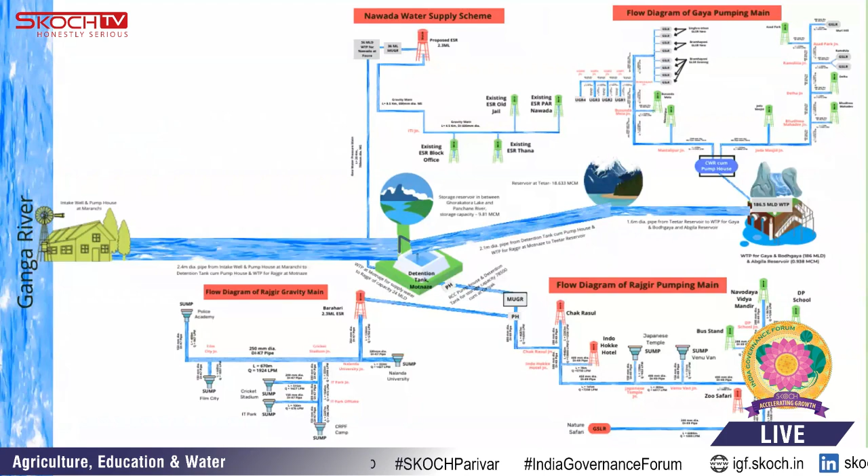This is a 151 kilometer project from Hathidah to Gaya town. In this project, we are feeding drinking water to 3 water-scarce towns of Bihar: Rajgir, Nawada and Gaya.

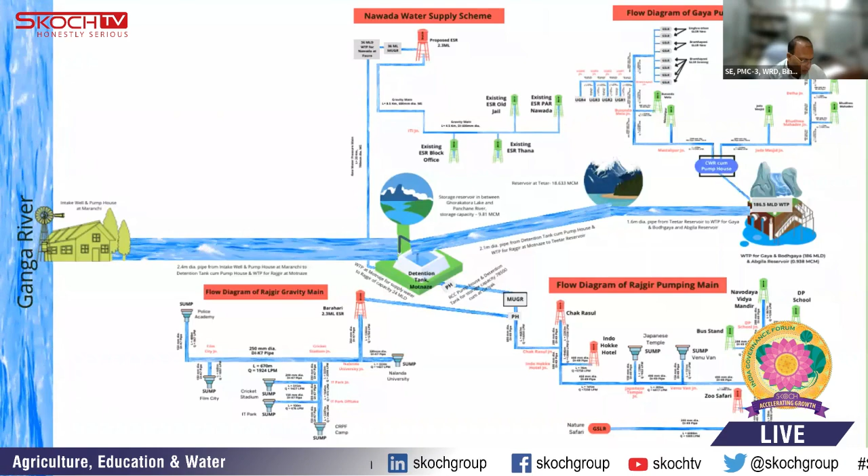In this project, we are lifting flood water in the monsoon season, for 4 months from July to October, lifting it around 80 meters from Ganga up to Gaya. We are creating 2 huge reservoirs, one at Gaya and another at Rajgir, where we store the raw water for the remaining 8 months.

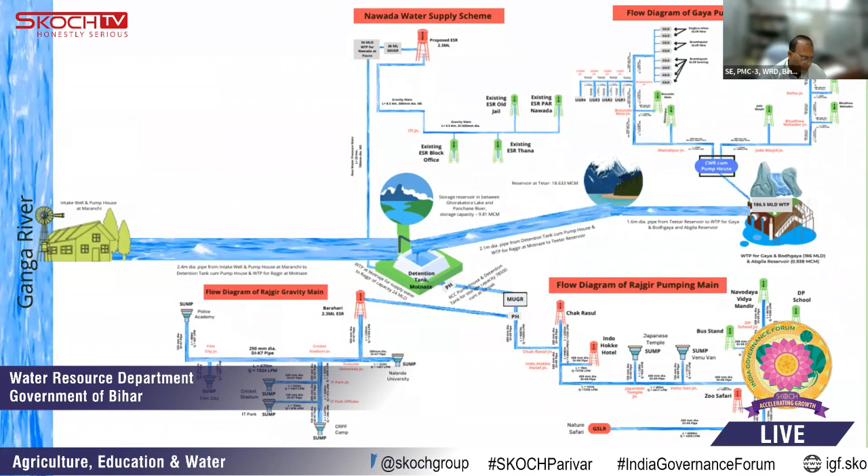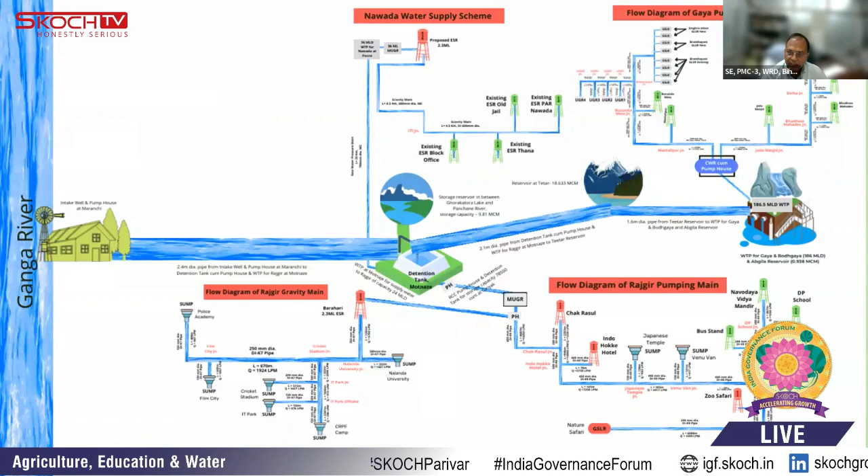We will supply drinking water throughout the whole year, after purification, to around 9 lakh people in Rajgir, Gaya and Nawada.

As I mentioned, this project has been formulated in light of our Chief Minister's flagship program, Jal Jeevan Hariyali Mission, due to the groundwater table lowering day by day in this area, and the resulting scarcity of drinking water.

In this project, we utilize flood water which was previously unutilized during monsoon and going waste into the Bay of Bengal. We extract this water during the monsoon period, store it in reservoirs for 8 months, and then supply it after purification.

In this project, water demand has been calculated up to 2051, and stage-wise we will increase our supply according to demand. Currently we are constructing this project for demand up to 2021, and gradually we will increase our capacity according to future demand.

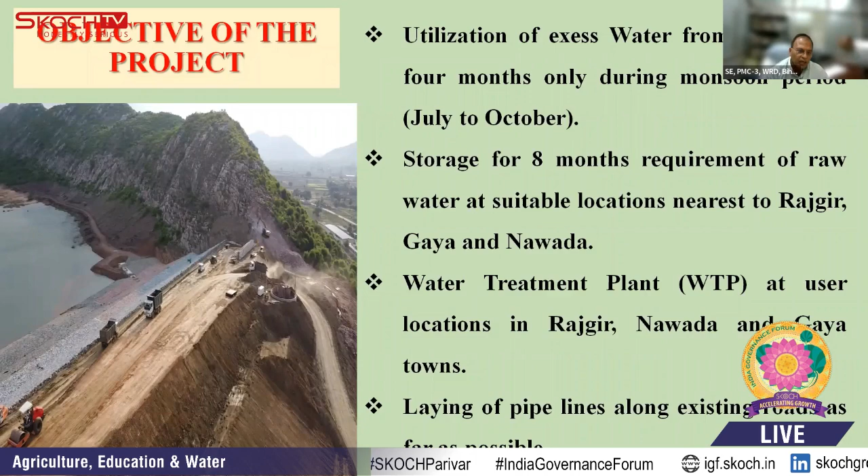Benefits of this project include employment creation for people in this area, socio-economic benefit with enormous convenience of drinking water to urban and rural people and animals, and groundwater recharge facilitated by storage of water in the forest region of Rajgir Reservoir in Nalanda and the reservoir in Gaya, ultimately benefiting flora and fauna, including the ecosystem.

As such, the project is techno-economically viable. Agriculture produce will increase due to improvement in groundwater level.

Also, the wildlife sanctuary at Rajgir will be provided water from the proposed reservoir for various animals in the area and also water bodies inside the sanctuary.

Religious places such as Brahmkund, Saptadhara, etc. in Rajgir, which are hot springs, have become devoid of water as a fallout of alarming groundwater depletion. Declining rainfall, inadequate recharge of groundwater, and overutilization due to increased population appear to be the main reasons for decline in discharge in the Rajgir hot spring.

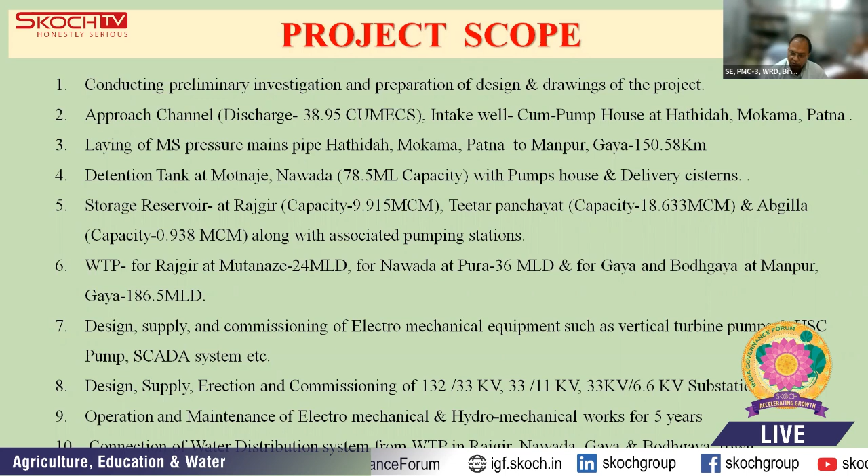These are a few pictures of the intake well at Hathidah Mokama, where we are extracting flood water from the Ganga.

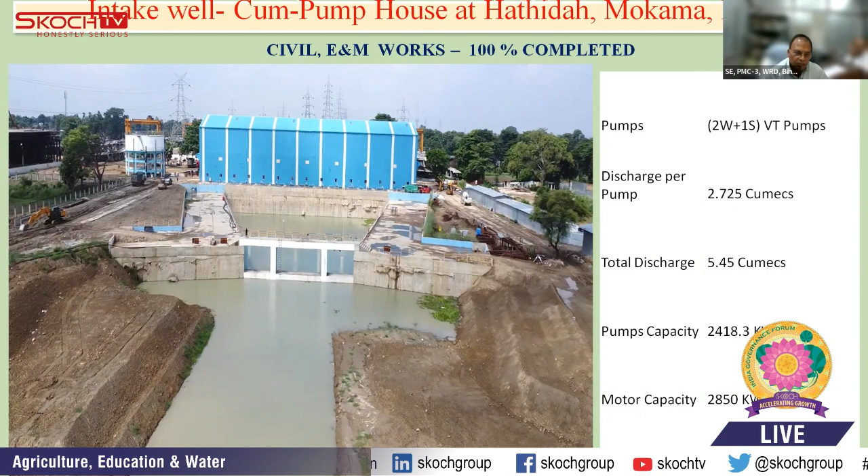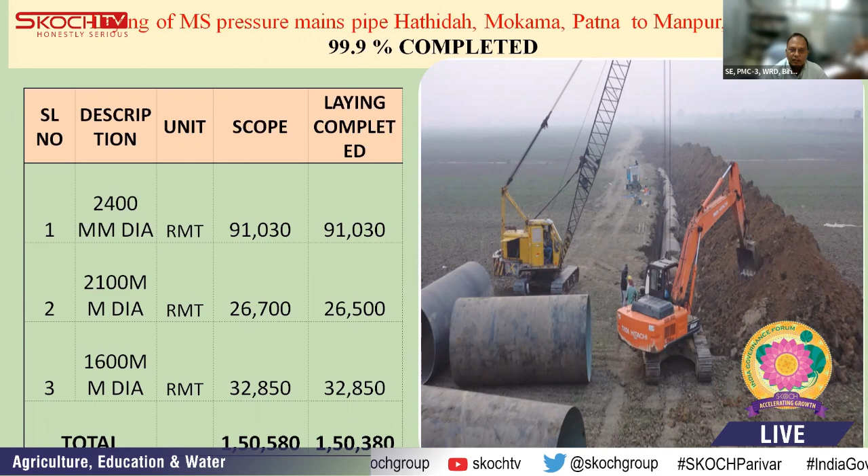These are pictures showing the laying of the MS pipe from Hathidah to Rajgir, and this is the detention tank at Motnaje, Nawada.

This schematic diagram shows the detention tank. We are taking water to the reservoir from here, and one pipeline is for Nawada town and another is for Rajgir.

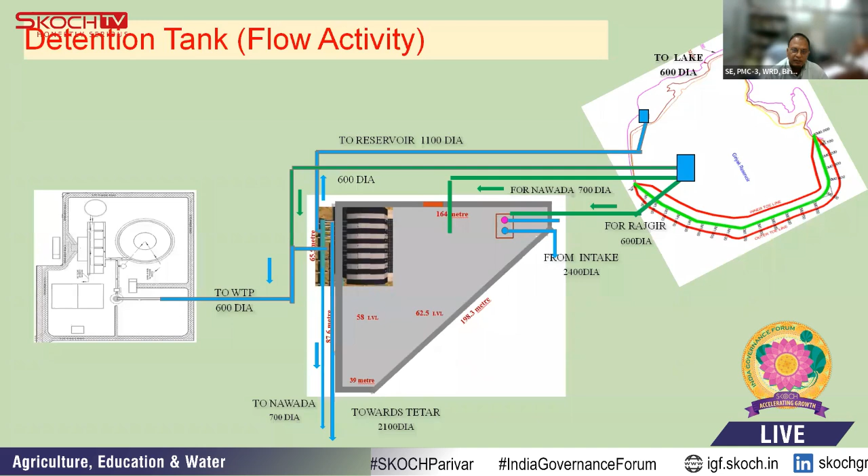Next, this is the highest level Tetar reservoir, which is situated in this pipeline at the highest altitude. We are so sorry to interrupt you, I request you please conclude now. Okay, next, this is Tetar reservoir.

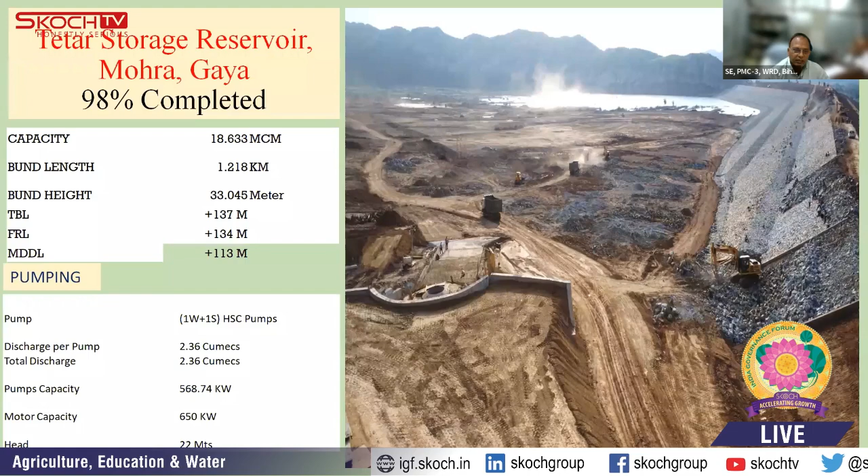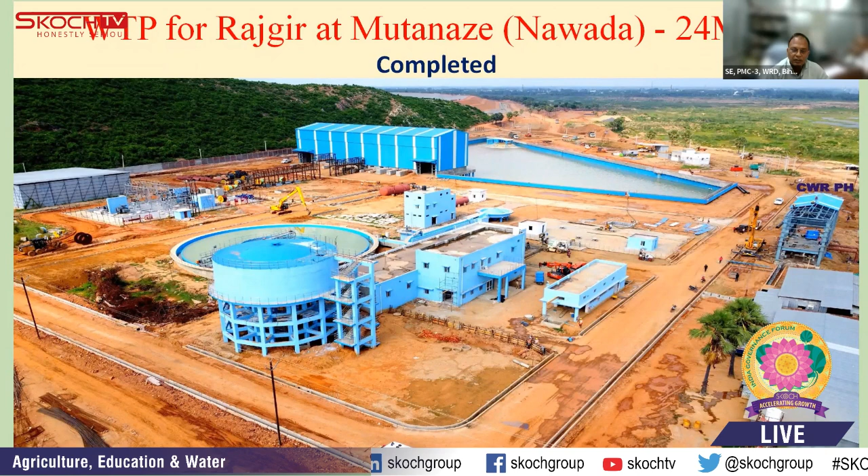Next, this is a water treatment plant at Nawada. Next, this is a water treatment plant at Gaya. And this is a Rajgir water supply schematic.

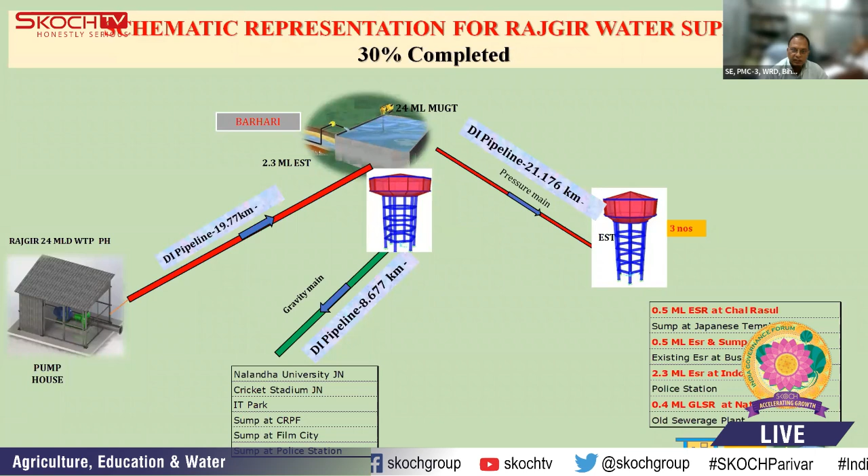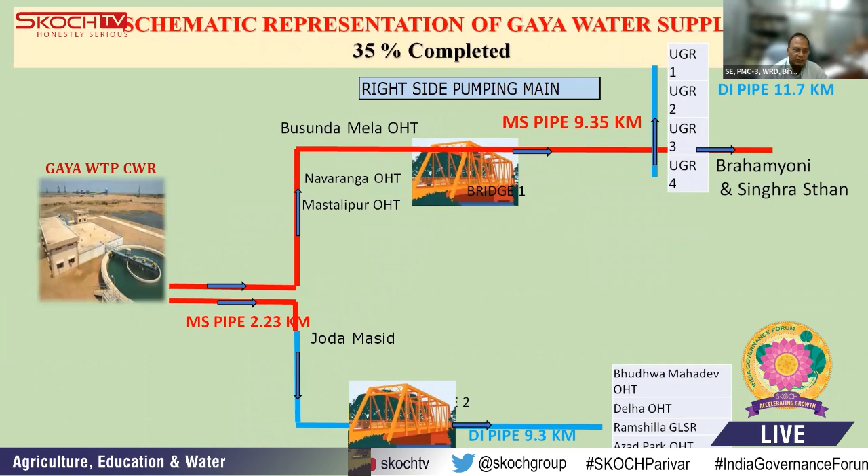Next, these are few pictures of different components. Next, this is the Gaya water supply line diagram. Next, this is the Gaya WTP progress of work.

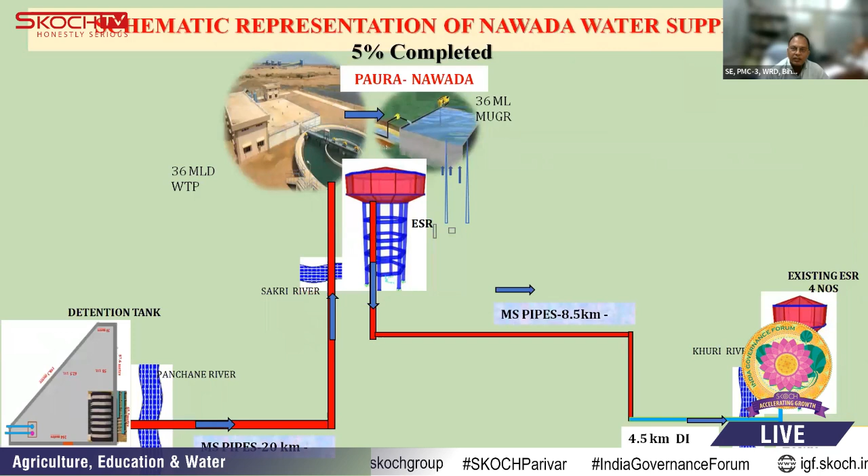Next, this is the Nawada town water supply.

Supply of Ganga Jal from the intake well to the detention tank is operable. Storage of Ganga Jal water in Rajgir reservoir is under progress. Operation of Rajgir water treatment plant is also ready, and distribution of purified water to Rajgir town is under trial run. Thank you.

Jury members. Alok sir, very good sir, project. But normally in such a large project, there is always a time and cost overrun.

So ji, when was this project originally scheduled to complete, and what is the full completion date expected now? Sir, this project started 2 years back in the Corona period, but overcoming the challenges of Corona, the completion period is March 2023. But we are ahead of the completion period, and we are likely to complete it by December. But our project completion period is 2023.

Okay, so that means there is no time and cost overrun. No, sir. Okay, very good sir, excellent work. In fact, this will augment the water supply in your area.

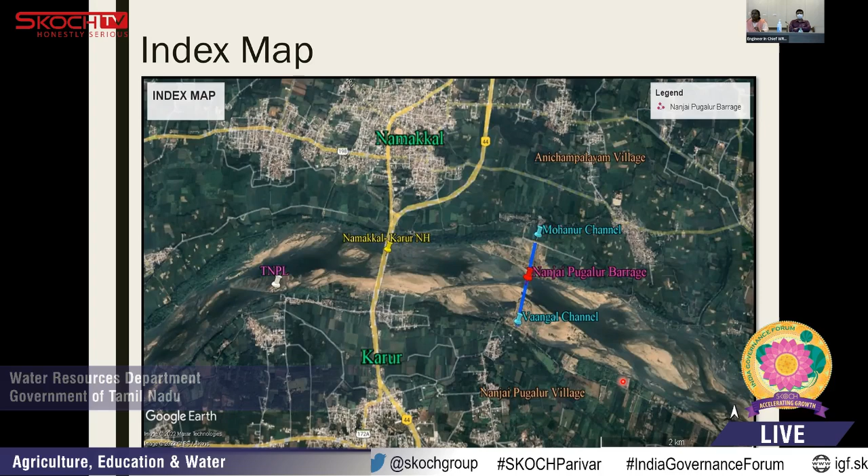Due to that, the farmers made a temporary arrangement known as Korabu works, which runs parallel to the flank near the bed of the river, so that according to gravity, until they attain the gravity level of the flow, they start the regulation from that point.

The existing Mohanur channel is located 6.75 kilometers downstream of the ongoing Nanjai Pugalur barrage project. From this point, the farmers take up the Korabu works till the existing point, and that Korabu work is only a temporary one, and when floods come, it gets inundated, and the farmers could not get a continuous supply of water for their irrigation. This is one of the necessities of the project.

And on the right side of the river Kaveri, where the Vaangal channel is located, at the axis of the barrage, the Vaangal channel is located just 200 meters upstream of the axis of the barrage. Even though the Vaangal channel is on the river bed itself, due to the lowering of the river bed, irrigation supply through the Vaangal channel was not done from 2014 till date.

We have adequate records that Vaangal channel had nil supply for the past years, and this Namakkal region, Karur district area, and the taluks, namely Paramathi Velur taluk and Pugalur taluk, is an overexploited region as far as groundwater infiltration is concerned.

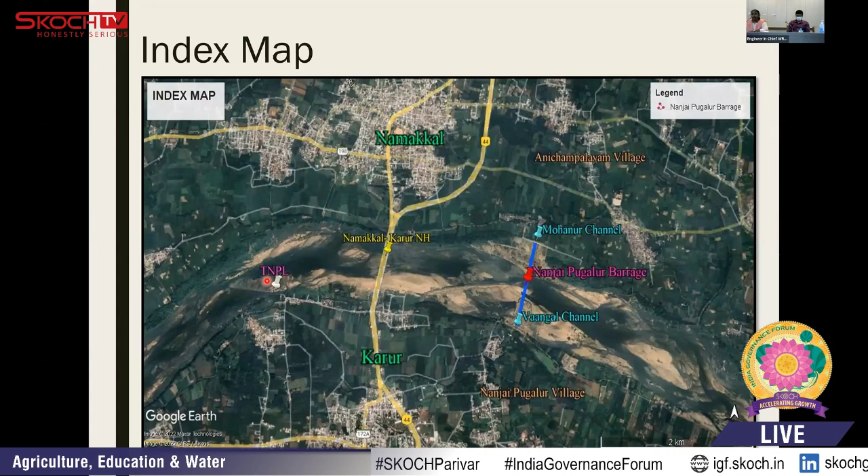This forms the necessity of constructing a barrage across river Kaveri in this location.

The benefits of the project: to overcome all these problems, the Mohanur Canal is, at present, offtaking directly on the left side of Namakkal district, and the Mohanur head sluice is being constructed right at the junction point of the left bank where the barrage is located, so that the farmers can get assured supply of water throughout.

The acreage benefited out of that is 2,583 acres of ayacut. In the same manner, Vaangal channel in Karur district will definitely be irrigated with assured supply, and 1,458 acres in Karur district will be benefited out of this project.

Drinking water scheme pumping wells, which are located in the upstream of the barrage, where 0.8 TMC of water is stored, there are 6 pumping well schemes in Karur district and 9 in Namakkal district that will be benefited. The total population benefited with this project in Karur district is 34,993, and in Namakkal district 71,612 persons will be benefited.

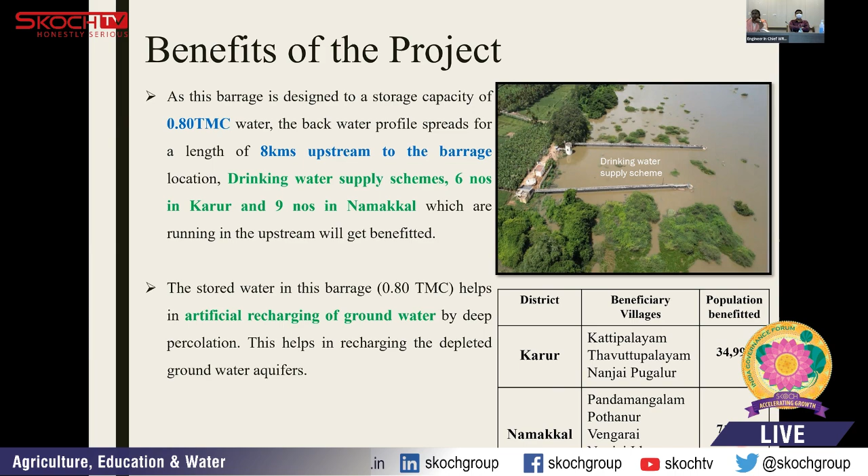Benefits for industrial purposes. As said earlier, the backwater profile length of constructing a barrage to a height of 5 meters will be around 8 kilometers. The TNPL, that is Tamil Nadu Newsprint and Papers Limited, which is located about 3.5 kilometers upstream of the barrage, will get complete assured supply so that their water supply will not be devoid.

In the event of drought and even in the lean water season, there will be a minimum head of 3 meters, which will result in no revenue losses for that company.

The challenges of the project: grouting. The construction of the barrage is actually to be founded in the rocky area. The barrage portion has to be founded in the rocky area.

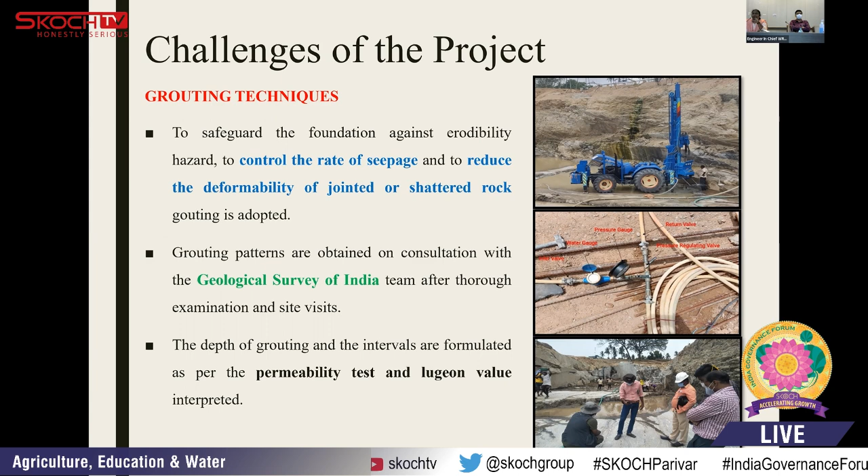The grouting techniques we are following safeguard the structure against the rate of seepage and reduce the deformability of the shattered rock. Grouting is adopted by calling upon the Geological Survey of India people, and their team comes and visits the barrage site location, and they give the pattern, and according to that pattern we start work on the other components.

Another challenge is the U-drain arrangement. In order to release the uplift pressure expected to be exerted at the base of the stilling basin, a drainage arrangement with required pipes below and above the foundation is provided. A water collecting system consisting of half-round cc pipes and porous concrete is filled in, and at the upstream we have a non-return valve so that the water pressure gets released in that area.

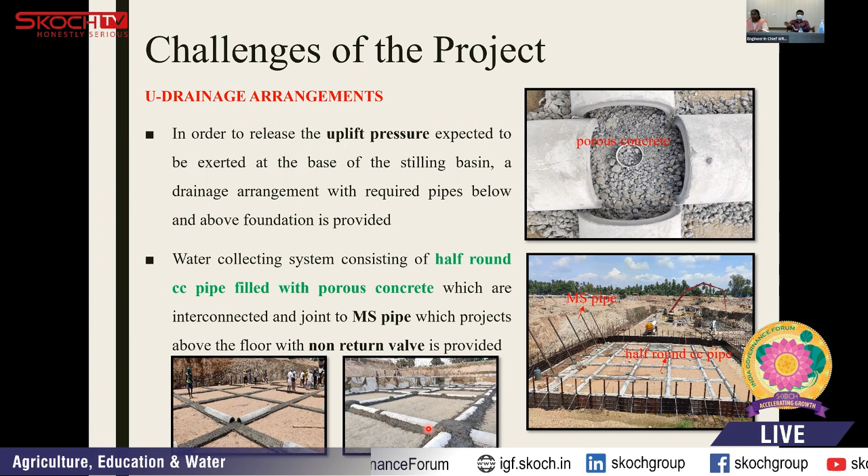The challenges of the project: Kaveri is a continuous flowing river all 365 days, even with a lean flow of at least 2,000 cubic feet for drinking water purposes. In this river bed, an open foundation of around 42 meters floor length for a length of 1,056 meters makes a big issue because of the challenge of dewatering problems.

The dewatering problem is sorted out by various means, such as the open dewatering method we follow. Then, if the layer is sand, it is better that we use the temporary well point dewatering method. In some places, after encountering various layers, the first layer will be sand, the other layer will be soft disintegrated rock, and the next layer would be the hard rock area.

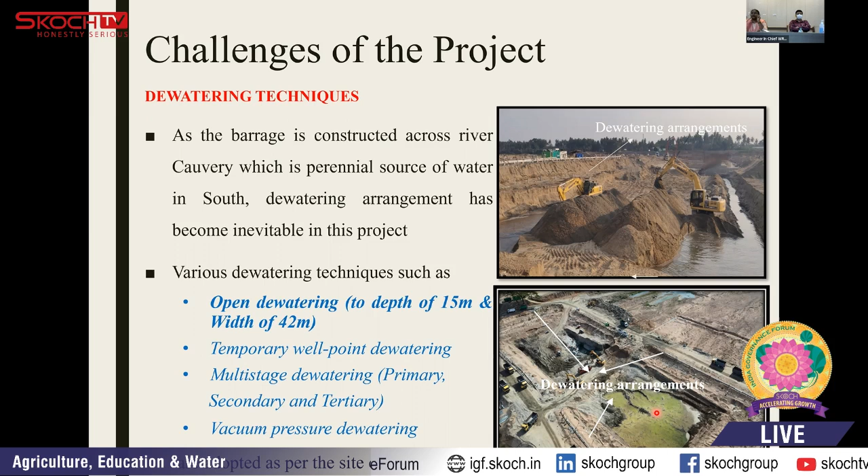In certain cases, after we encounter a sandy layer, we may sometimes get a layer of pebbles also. During that time, when the well point method or vacuum dewatering pressure method could not be done, we go in for multi-stage dewatering, which is a huge process for an open foundation earthwork. This is the challenge faced in the project.

Coming to the uniqueness of the project, since this project is located in a flat terrain, the slope of the river bed is 1 in 1,700.

Considering the aspects of the location of the barrage, the only available thing we can construct in this riverbed is just a barrage to store the water and make it irrigable to other areas. This is the lesson learned that in flat terrains, only a barrage structure could be constructed and water can be stored and utilized for multi-level purposes.

Another uniqueness of the project is the SCADA arrangement. After the regulating structure of Mettur, this is going to be the first structure with supervisory control and data acquisition, which is yet to be adopted. This stays much ahead of the conventional method of delivering water. By monitoring the water flow, the shortages and uncertainties of water to tail end users shall be monitored effectively.

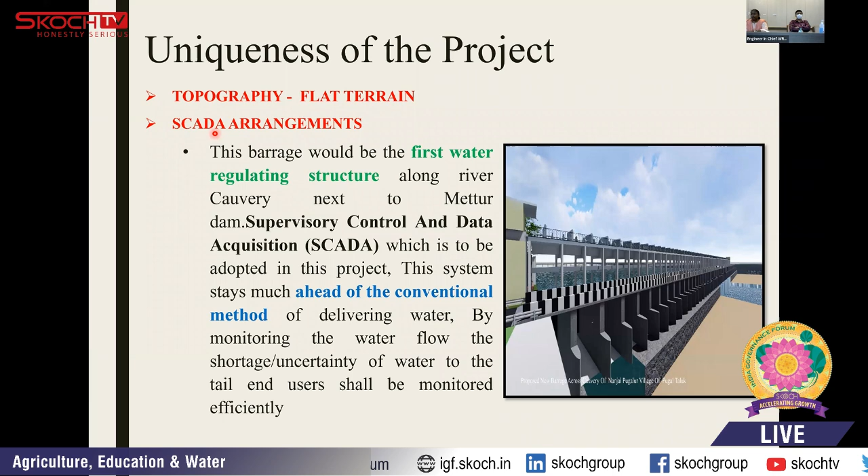Encompassing all of these things, agriculture is benefited around 4,041 acres of land getting irrigable, and the over-exploitation zone in groundwater is recharged. For drinking water purposes, 1,06,605 people are getting benefited from Karur and Namakkal districts, and as industrial usage, water worth 160 crores per year will be given to the Tamil Nadu Newsprint and Papers Limited.

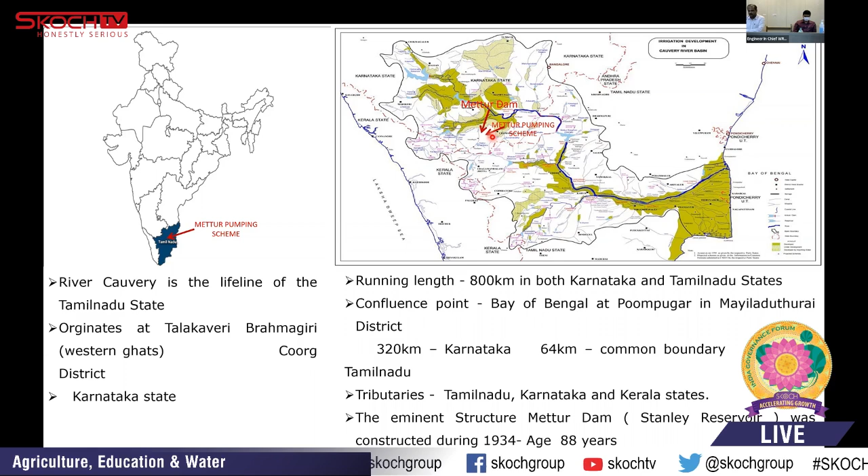Mettur reservoir at the Thippampatti station. Need and necessity of the scheme: the Sarabanga basin is one of the Kaveri sub-basins and is about 7 kilometers from Mettur town, in an over-exploited zone. Since most of the time most of the tanks are dry in nature, the groundwater table in these areas goes down.

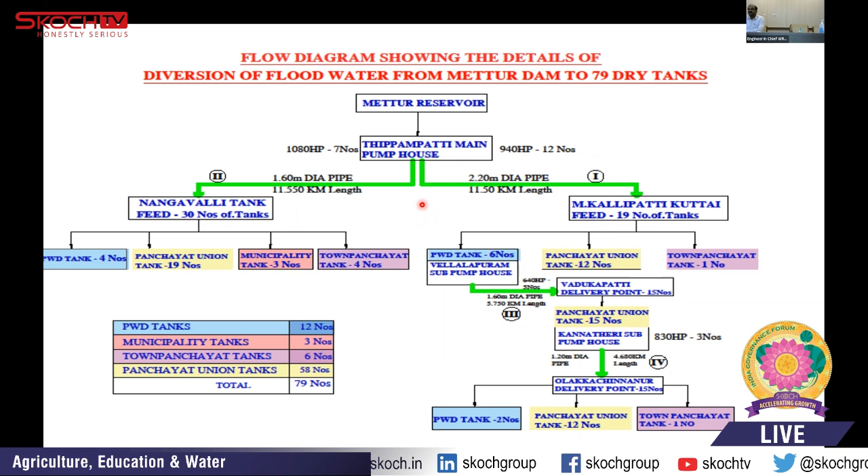In this scheme, there are 3 pumping stations constructed for lifting water at various levels. The main pumping station is constructed at Gonur village of Mettur to lift water to a height of 139 meters, and sub-pumping stations are constructed at Vellalapuram and Kannantheri, at about 60 meter and 40 meter heights respectively. Land acquisition work has been completed for about 74.58 hectares out of 109 hectares.

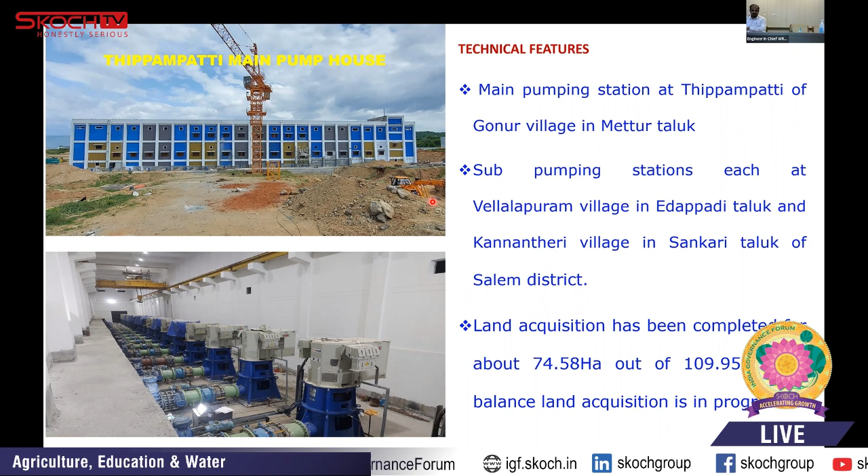By way of introducing cutting edge technology, this is a new technique, sir, to design the pumps and pipes.

Sarabanga subbasin is not a flat terrain and has a number of ridges. For that, we have to fix the alignment of the canal in the recharge zone to improve the subsoil water table in the command area, using the soil zonation map and contour map with the help of experts from technical institutions.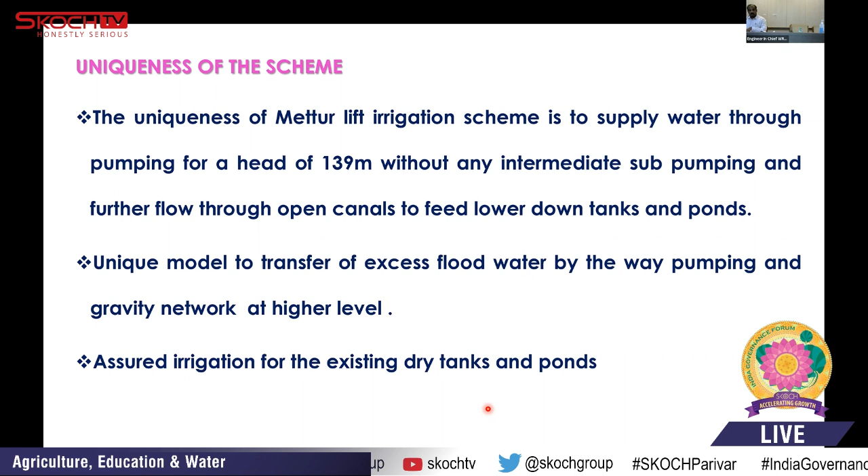Outcome of the scheme: this project becomes a model for transfer of surplus water to existing dry tanks for better availability of stabilization. It is a unique model to transfer excess flood water between subbasins by combination of pumping and gravity method. The groundwater table increases by about 30 centimeters in the over-exploited area.

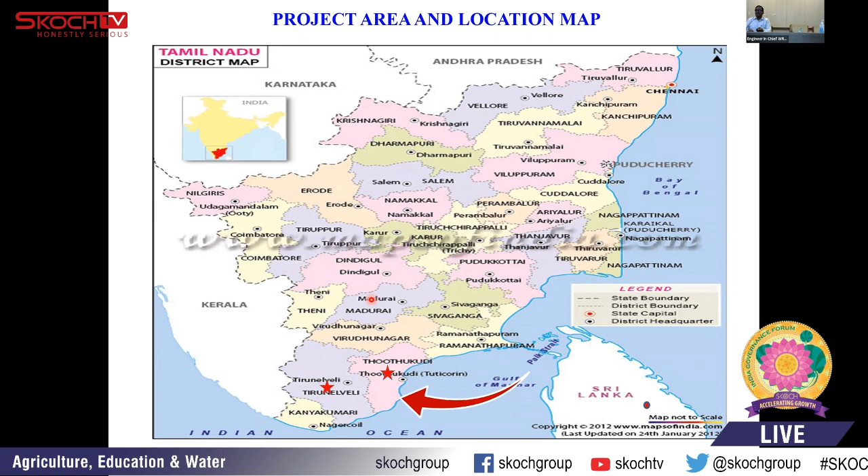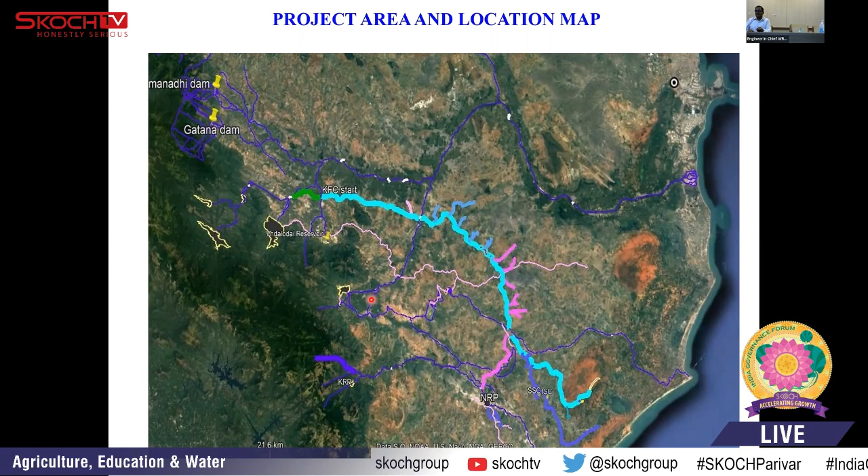The irrigation industry is also getting affected, and food security and water security is a question mark there. So our Tamil Nadu government has formulated an interlinking project within the state. Actually, Thamiraparani is the only perennial river that originates and ends in Tamil Nadu, so we have some surplus waters from Thamiraparani.

So we put up a diversion structure across Thamiraparani, diverting water to the tune of 3,200 cusecs for hardly 10 to 15 days in a year, without affecting the irrigation interest of the existing Thamiraparani basin. So we are diverting the surplus water to 3 river systems, linking one after another.

The length of the canal is about 75 kilometers total. We have created some infrastructure as well, including diversion weirs and two reservoirs, and some CD works. We also crossed railway bridges on the Tirunelveli to Kanyakumari railway line, and there is one NH44 national highway to Kanyakumari that we crossed as well.

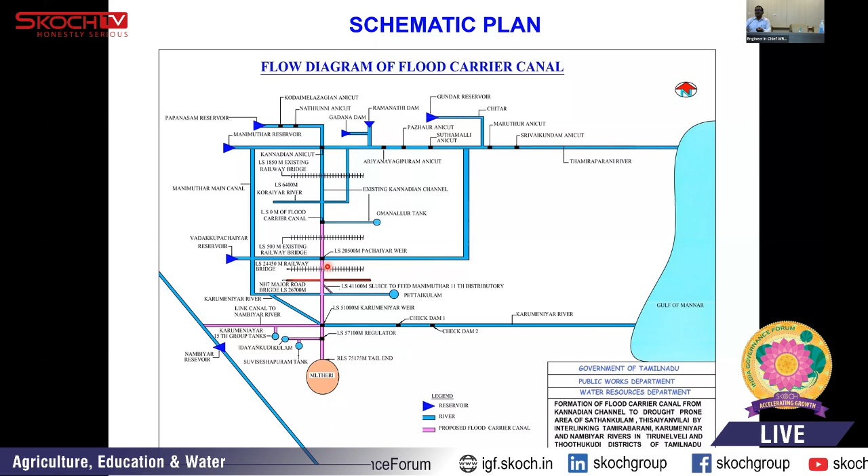This project was commissioned in the year 2009. Land acquisition is a major problem here. We need 1,227 hectares of land to be cleared for making this canal and other hydraulic structures, out of which 1,000 hectares of land is from private landowners. So land acquisition is a very complicated and hectic issue.

We keep moving land acquisition through our district administration, and many of the private landowners go to court over these matters. There were a number of litigations, but we sorted them out one by one, and finally we got the lands.

Right now the project is completed in stage 1, stage 2, stage 3, and stage 4. Stages 1 to 3 have already been completed, and in stage 4, almost 50% of the work has been completed, with remaining works in progress. Hopefully this project will be completed by March 2023.

We started this project with an initial cost of 369 crores, and due to cost escalation, land acquisition costs, additional quantities, additional items, and some new components, the final investment comes around 933 crores as of today.

We have excavated 5 million cubic meters of soil for the open canal. This is the open canal with a carrying capacity of 3,200 cubics, running about 75 kilometers. How to dispose of all this excavated hard rock, soft rock, and even gravel is a very big challenge for us.

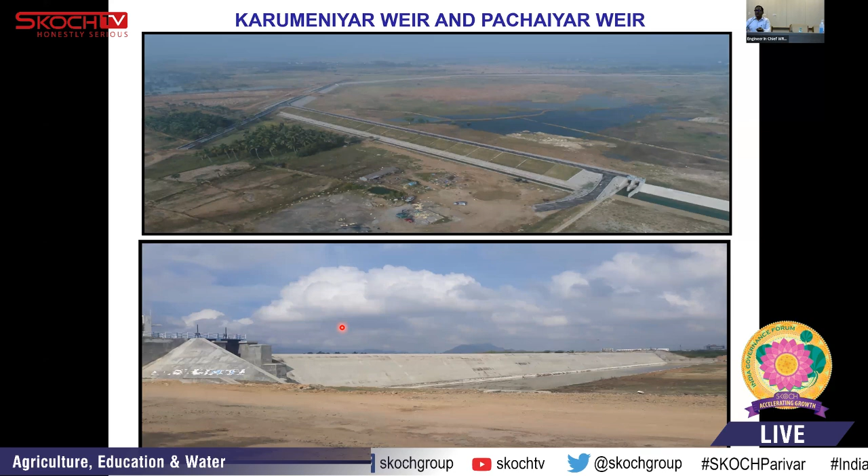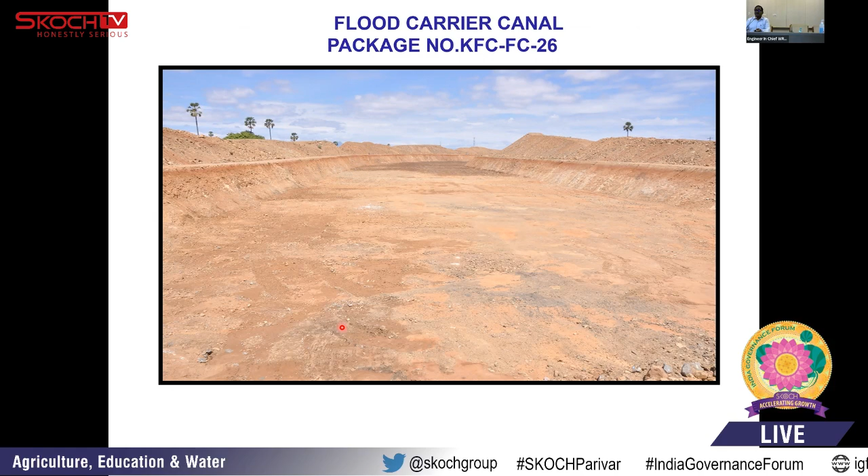The second one we already started is the Kaveri River linking, another interlinked project. This is the open canal, an unlined channel with carrying capacity of 3,200 cubics. This is the tail end of the project, where it is teri sand, almost like a desert, something like Rajasthan. Here the challenge is how to stabilize the slope of the canal. IIT Madras and other institutions, our knowledge partners, are working on that part. We are making proposals for stabilizing the teri sand canals for 6 kilometers.

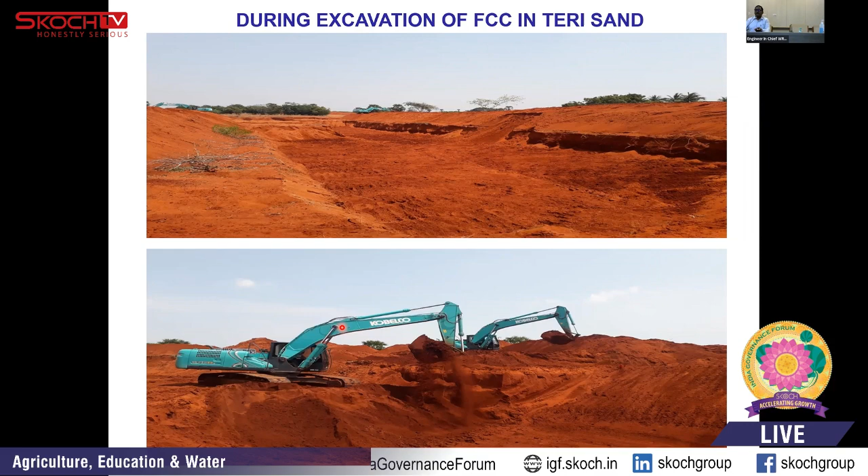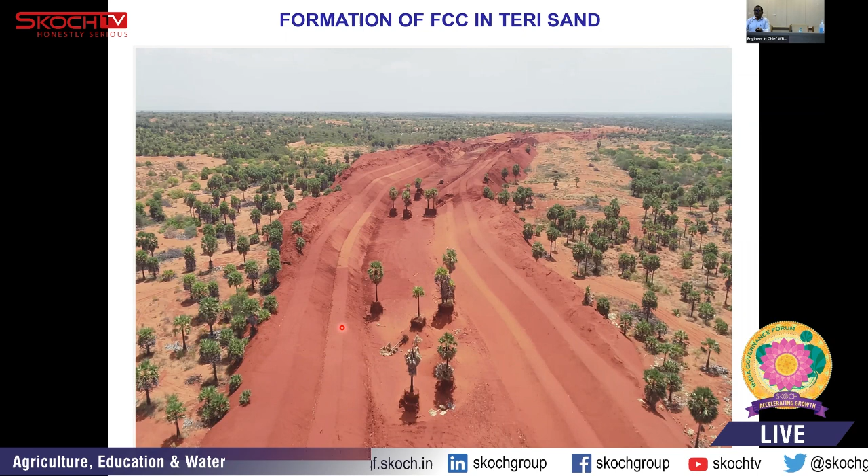So this is the canal with precarious sections, teri sand in the southern part. It is a specific area, not everywhere, probably 6 to 7 kilometers where we face this issue with sand. Many external agencies are working on it, figuring out how to go about it. And these are some structures, a few created for this interlinking project.